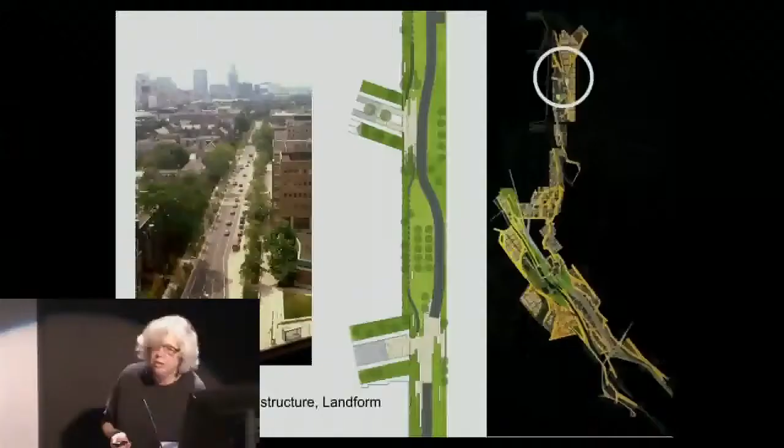Okay. And this was the title slide from last year's talk, and I was talking about linear networks, and I'm talking again about linear networks, but we're focused more this year on railway corridors. The ones that we talked about before for linear networks and how they made that middle space that we were interested in were projects like St. George Street and the West Toronto Railpath, which goes along a railway corridor, which is really the direction I'm going more in today.

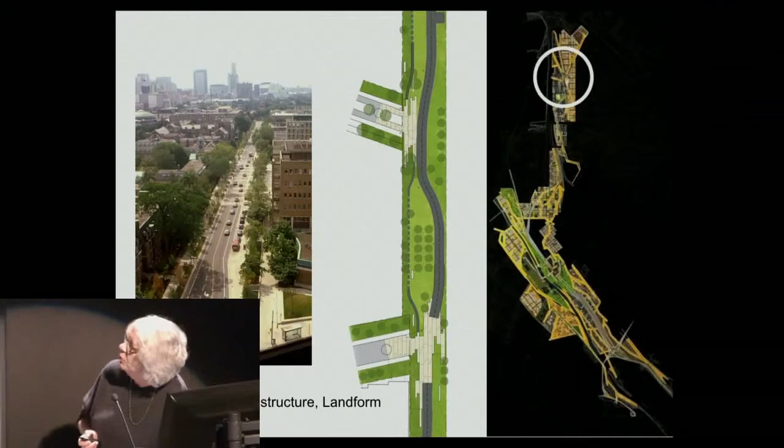And also the more organic thing that was based on earlier Garrison ravine work, where we transposed that organic model into a new sort of civic regenerator machine for the Montreal International Gateways competition from several years ago. So I wanted to focus on a number of projects. What we're doing right now is some in-house research on Dupont Street in Toronto, which is a really fascinating area for us, and it brings into play a lot of earlier work that we've done.

So what I wanted to do today is talk about several topics through some of the projects we've done in the last 4 or 5 years, which talks about agency and the autonomous agent, public space and infrastructure, making objects and spaces, connections for parallel systems, and essentially leading to the whole idea about employment lands and building types that can be great generators from the railway corridors.

The railway corridor, for us, is one of those amazing historic systems that run through the city, and is very often lined with either abandoned industrial or light industrial. It's also an area that has relatively strong boundaries of where you cannot trespass, and those are one of the big things that we want to talk about, how you cross disciplines, how you cross agencies.

To talk first about the West Toronto Railpath, which was an area where there was a line that the city was able to obtain in the west end of the city. So you have a whole rail corridor on one side that is still in operation, which is in fact the Union Pearson link, which is going to open soon. And then the West Toronto Railpath, which was made into not just a cycling expressway, which was what it was meant to be to begin with, but more of a linear network park that reconnected the city back, made connections from the street up into the upper landscape.

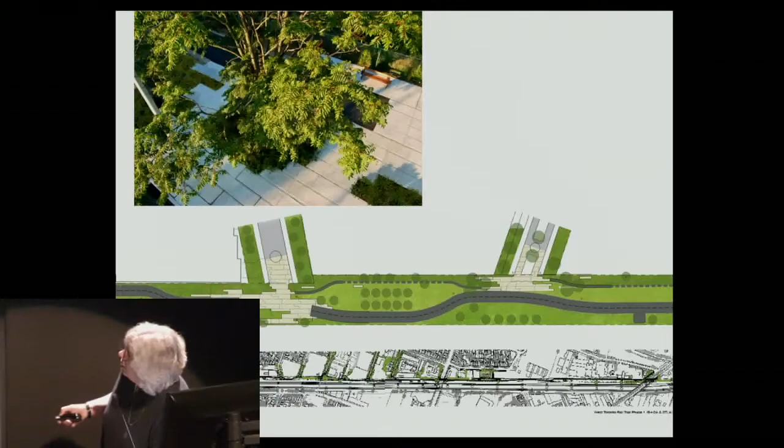So what you have, in fact, is a system of a linear network that actually started connecting all of these streets together into a linear system. And then you see where they connect into streets and into buildings which are now starting to get developed around the edge. So it starts spurring a whole building intensification along these edges of the city.

And also, this is the Wallace Avenue Bridge, but where you have these pedestrian bridges, you start having a really terrific system for people on the other side of the tracks to actually come over and make use of that system too. So it points the direction to where you want to have more linkages. This is another one of those street endings, very simply done, where the street ends there, different pavement, and then you continue through there.

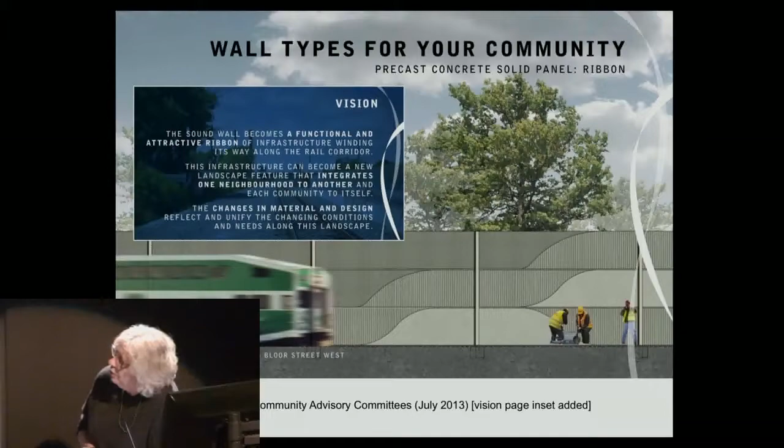So based on that project and based on other work we've done, we worked with the Junction Triangle Rail Committee, and I think I mentioned this project briefly last year as well. But this is a Metrolinx panel, and the Union Pearson Link also runs by the West Toronto Railpath, which also, of course, goes from Weston down to Union Station.

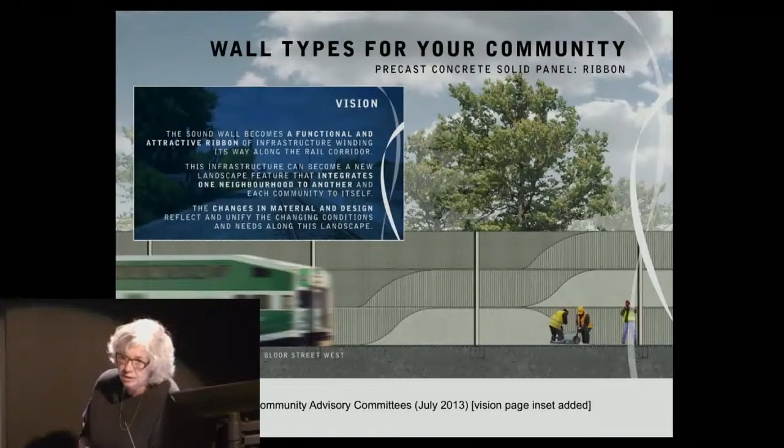One of the controversial things that was happening was this 5-meter sound barrier wall, which was being built. It's 5 meters high, which is quite high, and also blocks off that whole corridor, and it was built as if the trains were running at capacity. These are diesel trains, and so they were building about 10 kilometers of noise barrier walls.

So, always anxious to burn bridges with large institutions, we decided to work with the community and actually put together some work with them. But the idea was that this is the base project which is happening. So you're having about 10 kilometers of noise walls being built. Here's the Weston GO, the Eglinton Crosstown. These are connections that could be made to work. So you have the St. Clair streetcar, the Bloor GO station, the West Toronto Railpath, Carlton Car, Bathurst.

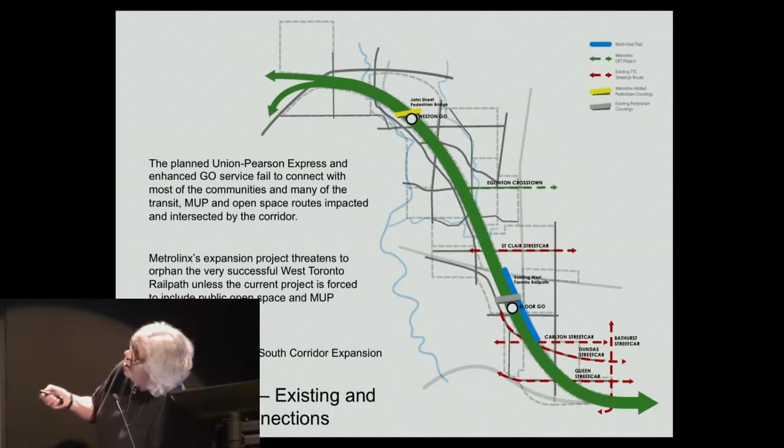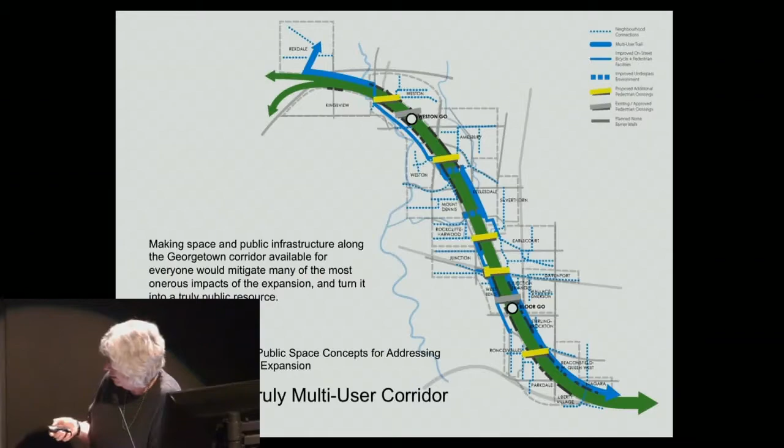And there was a lot of mapping, but the point of the mapping was to show that instead of creating this dense wall 5 meters high, you could start using that as a catalyst infrastructure for creating a shared boundary with the communities that could then start creating pedestrian linkages and basically start connecting all of these neighborhoods named here to the other side of the rail corridor, which were historically disconnected when the railway came through. And the idea is that it's a multi-user corridor, and that the boundaries are shared rather than closed down.

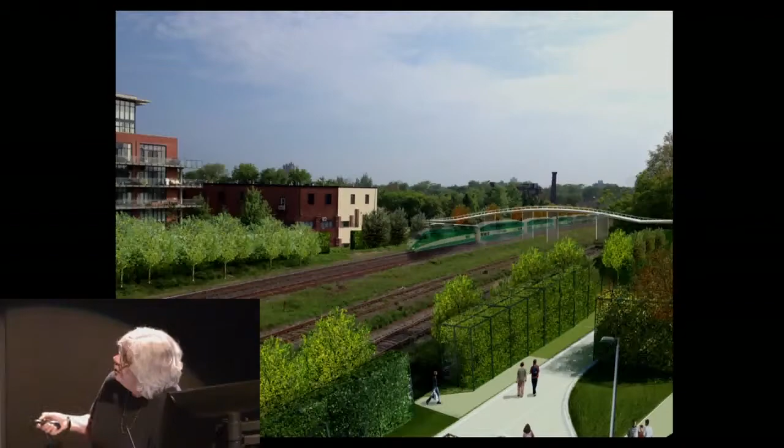But the fact is that these rail corridors give us this opportunity to create public space connections all the way through the city, from inner suburbs to downtown, and that divided city that we're all talking about actually has these built-in networks that we could be using. More pedestrian bridges that connect the neighborhoods together, a new urban forest planted to replace the one that they took down.

So if you go through a number of quick scenarios of the West Toronto Railpath, this is showing, for instance, that forest that used to be there. This is it now without the forest. And then that's the West Toronto Railpath with the 5-meter wall against it. And then, if you have to have the wall, try other things. Try pilot projects. Try to ameliorate those things. Obviously we're attached to the West Toronto Railpath, but there are all kinds of other situations through there where those things can happen.

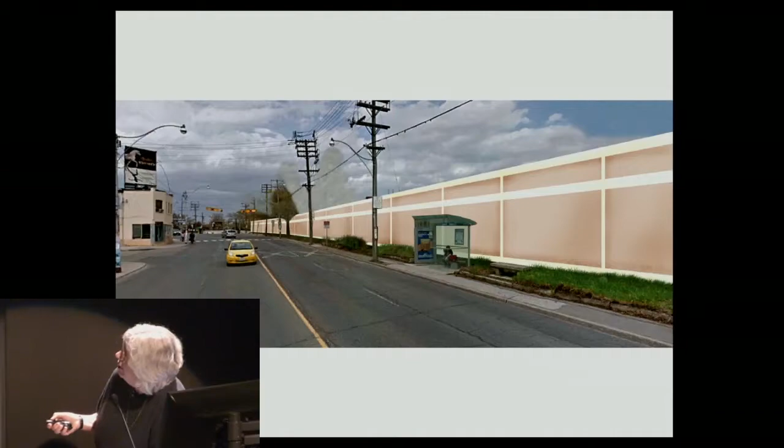Here, for instance, at Dundas Street West, north of Bloor Street, someone's gone to some trouble to try to landscape that narrow piece of land there. So what's going to happen is that you're going to get a 5-meter wall, and this little strip kind of becomes nothing because it needs that space behind it.

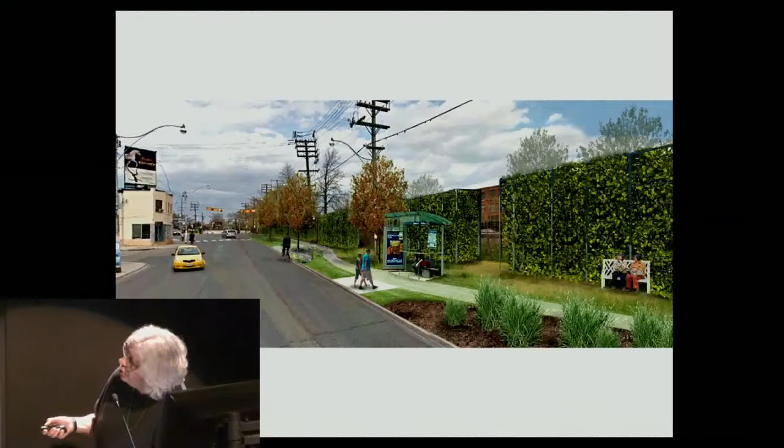So at the same time, and this is a question about agencies and these very strong corporate groups that operate separate from the government and seem to be a bit above the government, when this is going to happen, why not, first of all, build the shared boundary? But then at the same time, maybe there's a time that the City of Toronto could start talking to someone about, well, maybe this is a good opportunity to make this a wider pedestrian network, and we could look at narrowing this street. The thing is connecting things.

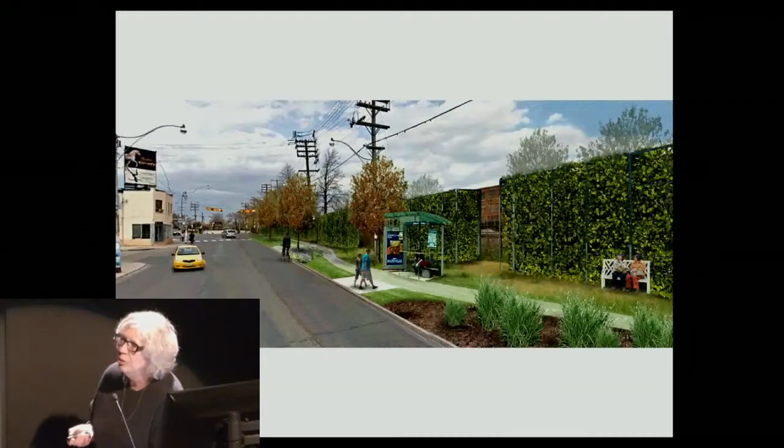It's like talking about silos that need to be broken down. At this level, you have the silos of the railways, which are unaccountable to anyone, as it would appear. Metrolinx, the province, the City of Toronto, and who else? I mean, there's lots of others, they all spring up. So the idea is that these opportunities are things that we should be taking advantage of.

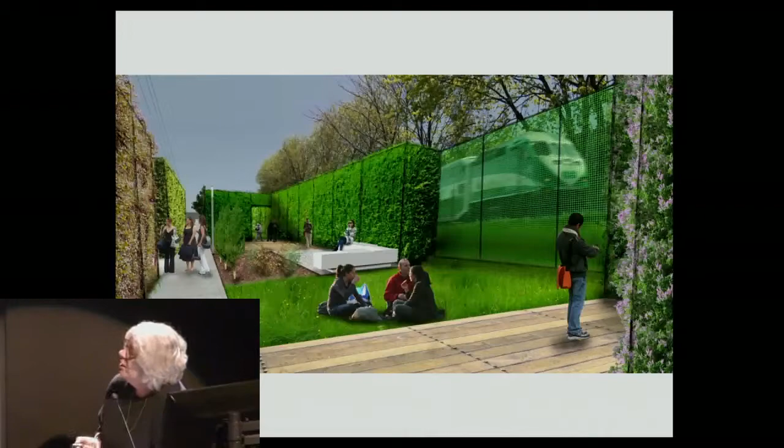But the point is that if you are working for the city, or if you're working for Metrolinx, they have their boundaries very strictly applied, so that you really can't be that agency that suggests those changes. So our point of view is that as autonomous agents, we're sort of dropped into a situation where we can suggest things about the railway corridor, the planning department, transportation, all of those things, but they need to be cross-fertilized or cross-pollinated, as it were. And the agencies we have now are not able to do that. So that is informing why we are actually looking at the Dupont Street study.

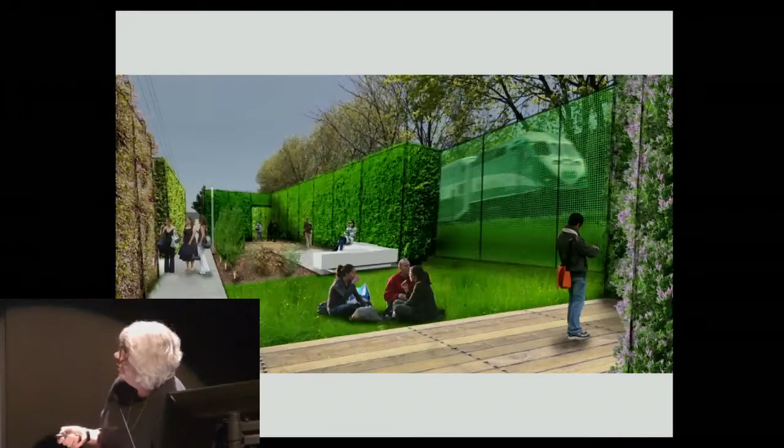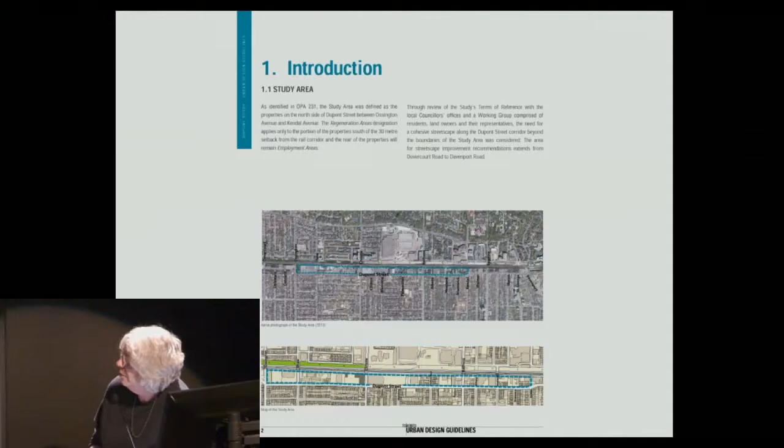This is actually an illustration from the hydro corridor Greenline competition from a couple of years ago, which again shows the idea of having a public space network at the same place where you have a train going by, green walls, rooms in the garden, essentially. So to take a step into the agency question, and I don't mean this as a criticism of the planning department, but because of the limits that they necessarily have to place on themselves, we're not getting the true potential of these areas in the city that we should be.

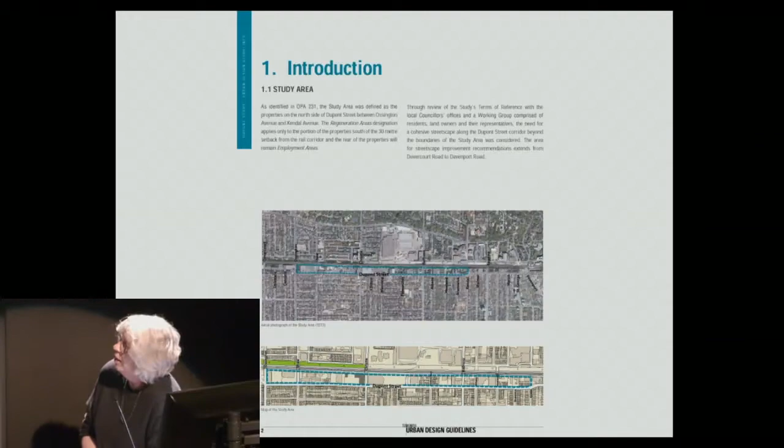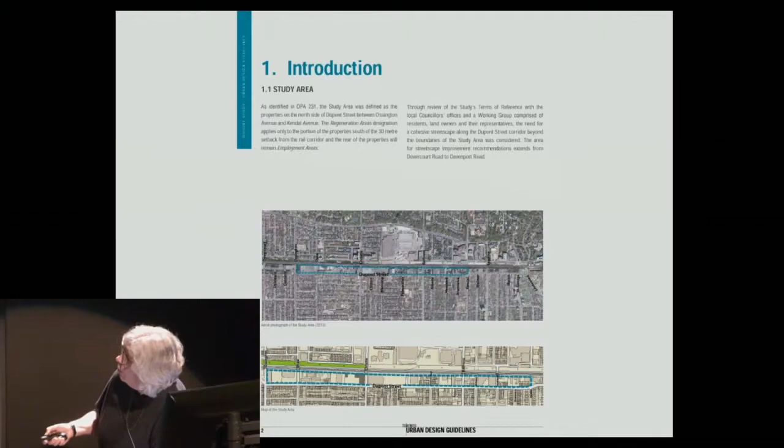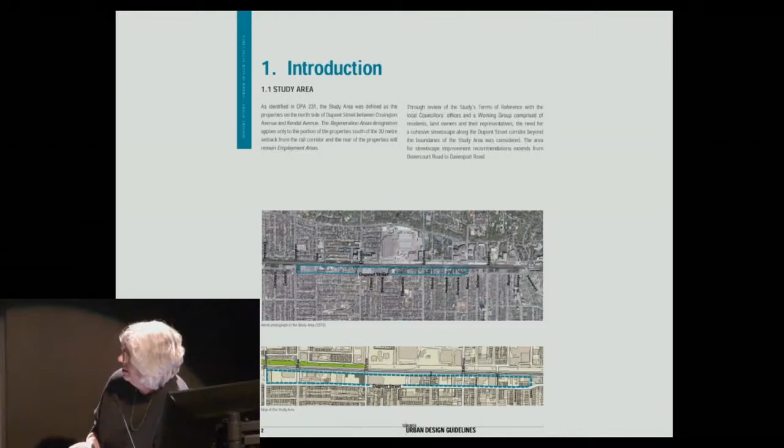Looking at Dupont, this is the City of Toronto Dupont study, and really it looks at the employment lands in this area. I believe it's between Kendal and Ossington. And what's going on in this area is really quite an amazing part of the city. We have the hydro corridor, we have a whole established neighborhood to the north. We have the hydro Greenline corridor directly to the north. We have the rail corridor. And then we have Dupont Street, which is a long street with several cross streets at key intersections, but basically one long area that is really used for employment, for earlier loft buildings, a lot of single-story buildings, and is actually up for a lot of development applications right now, which are not particularly attractive.

The disconcerting thing about the Dupont study for us was that there's an immediate adoption of the avenues model of building on Dupont Street without any real contextual analysis of what was there, really looking at what was going on on the street, any kind of public space initiatives, and assuming that there's nothing in here where the city can really insert itself.

If you look at this, this is the mid-rise model inserted into the Dupont study. It's a typical mid-rise building, 3-story base, set back, 3-story upper base, set back, 2 stories. And basically a very thick building, and we were talking about some of those possibilities of employment type buildings this morning. And I thought it was interesting, the talk about the tertiary and secondary systems that could actually make these built forms more porous.

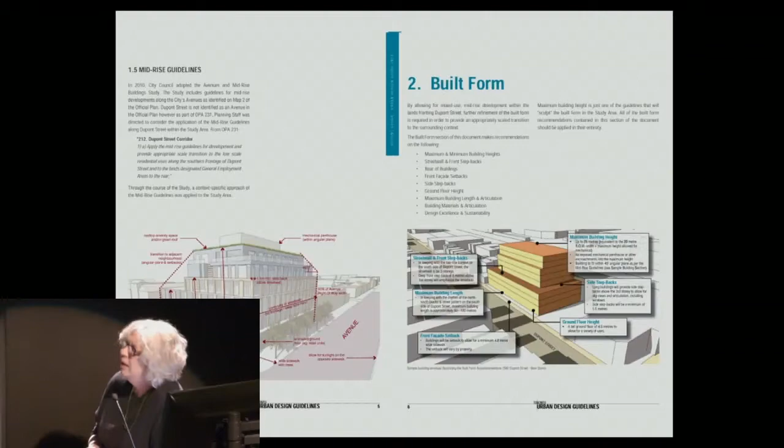And also, there's nothing going on behind here. There's no talk about the railway lands. The whole railway corridor is a system, we should be able to plan for 20, 25, 50 years into the future.

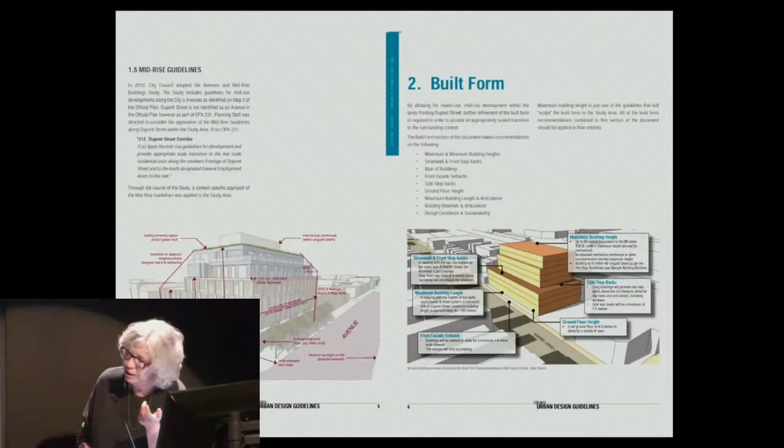I'll only be about 60 then. And we should be able to actually imagine electrification. We should be able to go past diesel trains. We should be able to talk about, as Andrea was talking about, maybe not this particular corridor, this conversation, but the idea that this could become adopted as part of a city transit system. Why shouldn't we be developing guidelines that anticipate things that could happen in the future, and by anticipating them, start the work in the right direction?

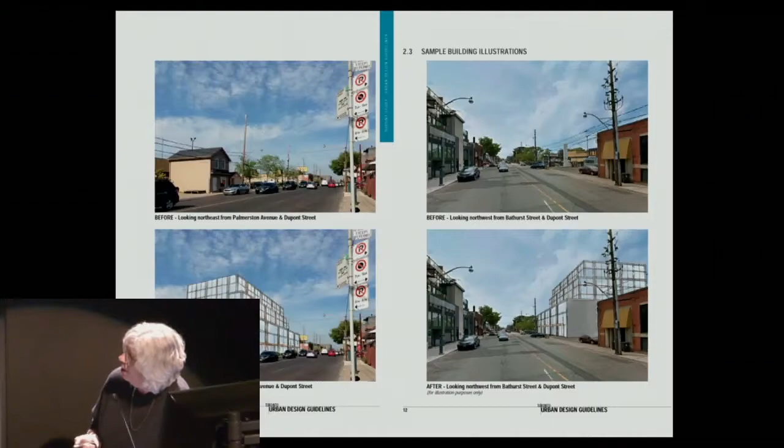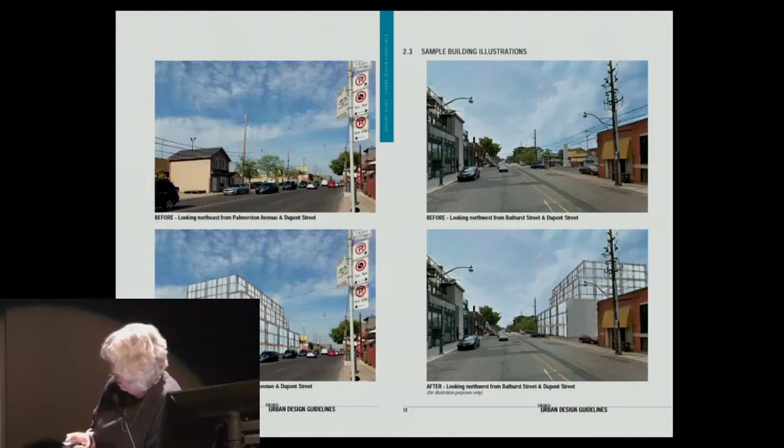This is a view of Dupont Street from the city's study. And I just think the city could do better than this. And these are the areas that are under review for applications. So you can see there's quite a bit happening, potentially happening on the street. There's a lot of interest in development, and this is surely the time, or maybe 10 years ago was the time, to actually be looking at all those potentials that exist in this area.

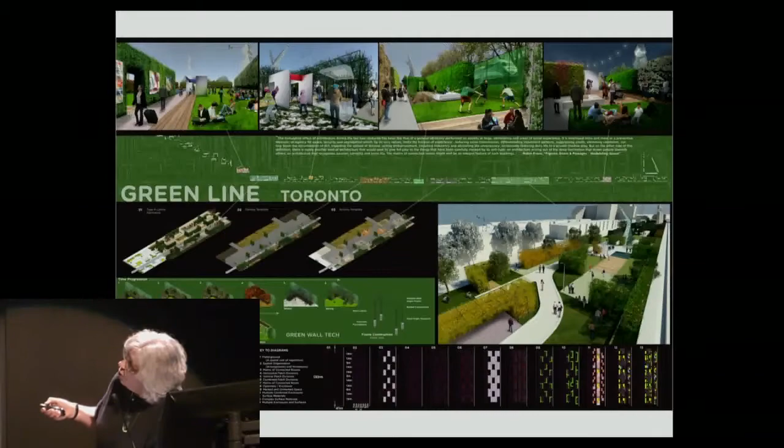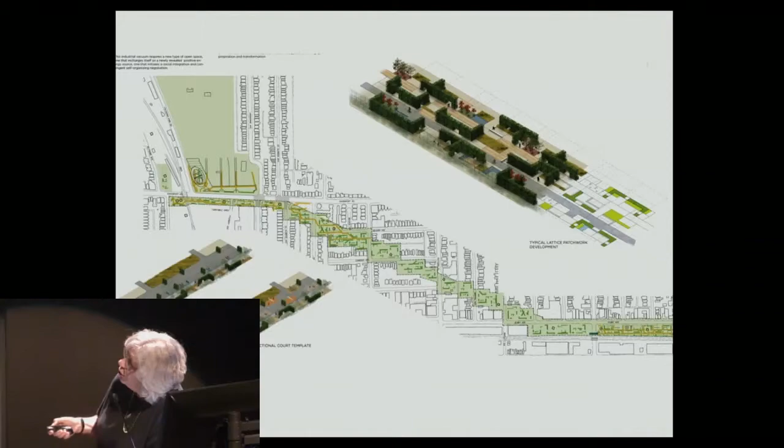See, this is a part of that plan, so that where you had a parking lot, you developed the edge of it, and as it became more and more public, that would become more like the model of the actual rooms in the garden that would go along that whole stretch of the hydro line.

And that could be a spot for, right now you see this happening a lot with advertising. It could be public art. It could be a part where you store bikes and people can walk right through there. And where it connects into the street, you could have a public washroom. Heaven forbid, in Toronto you would have a public washroom, or a pop-up cafe, things like that that actually start connecting that landscape of public space back into the city at regular intervals.

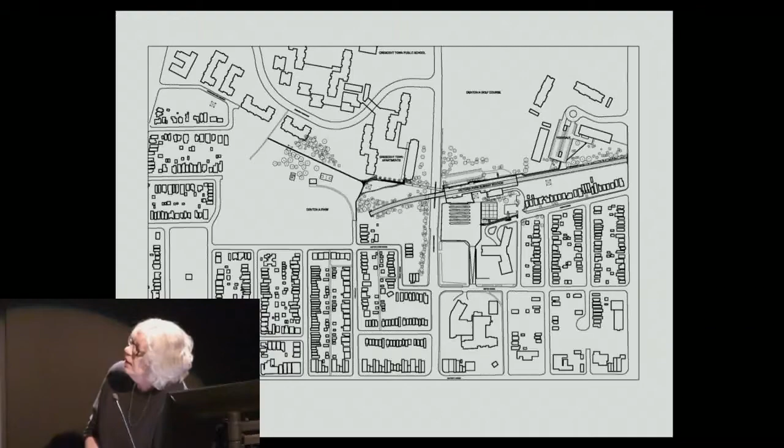So really at that point we were looking at the public space connections, the potentials of these linear networks and how those work to connect neighborhoods, and making new long public spaces that connect back into the city itself.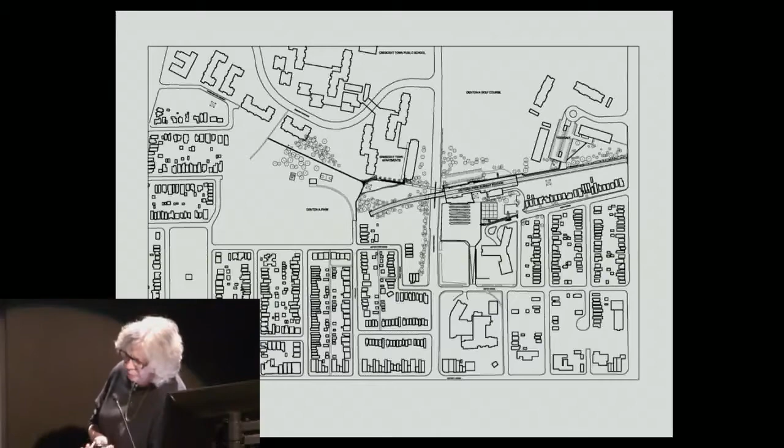This is another project at Victoria Park Subway Station. It's a different kind of railway corridor, but one that we worked on in different stages over the last 10 years. This is the Victoria Park Station here. The subway tracks come along through here and then disappear into the landscape and go underground. This would be your above-ground subway, Philip, that we were talking about at lunchtime.

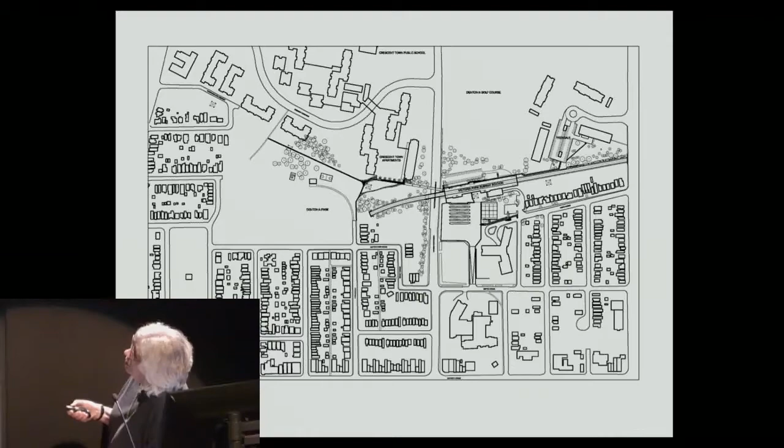And this is at Dentonia Park, where you have basically an empty, nondescript park here, and a pedestrian bridge connection. And then you have a lot of high-rise towers that have been built in the tower-in-the-park model. Our mandate in that project as urban designers was to start figuring out these open spaces in the larger context: we had Massey Harris Creek, we had Crescent Town, we had the tracks, a park, and then a traditional neighborhood on Bloor, the Danforth down there.

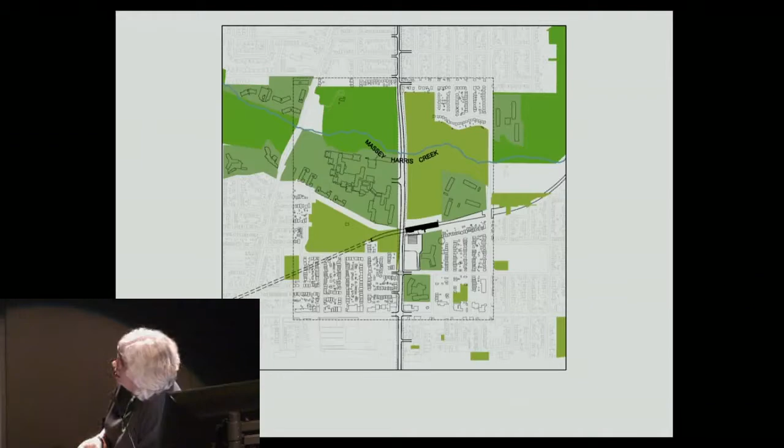So for us, the challenge was to start finding ways of making stronger pedestrian connections into that transit hub at Victoria Park, and trying to bring more of a real linear park nature, springing from these pedestrian routes from the Teesdale apartment buildings, across Victoria Park and into the Crescent Town buildings here, which is already really well traversed, but trying to make it safer and a way that can springboard into more public space.

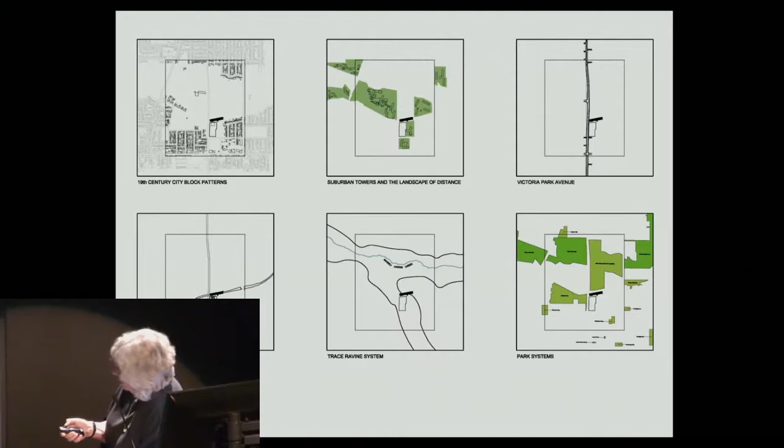The system, these are some diagrams that kind of show the traditional block patterns, the suburban kind of towers, Victoria Park Avenue, which really just began to have sidewalks after this project was finished, the tracks, the ravine, the trace ravine, and the park system. So this is all kind of an area where all of those systems are sort of disconnected, and how can you find a way of bringing all those together?

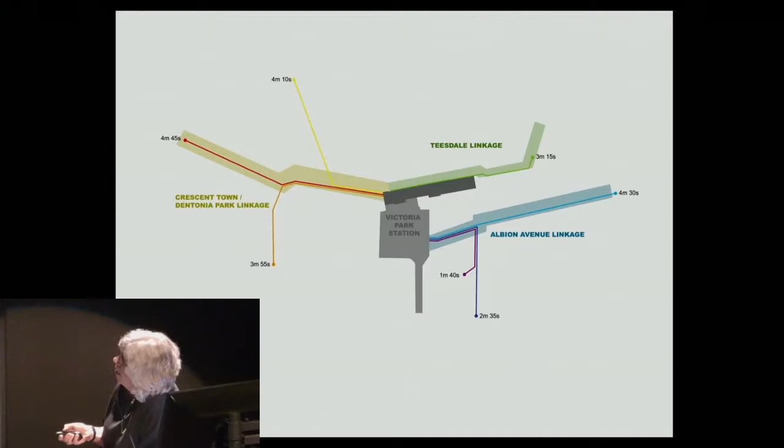The apartment linkages we were looking at were the Teesdale linkages from here, the Albion Avenue linkage, and also the Crescent Town linkage. So that was the existing condition of Victoria Park. I mean, this stairway seemed to be, speaking about agency, in a kind of a no man's zone where there's a sign that said there was one flight of steps that was not going to be maintained by either the city or the TTC, so you took them at your own risk. It was a very bizarre situation, but it just somehow fell between those jurisdictional cracks.

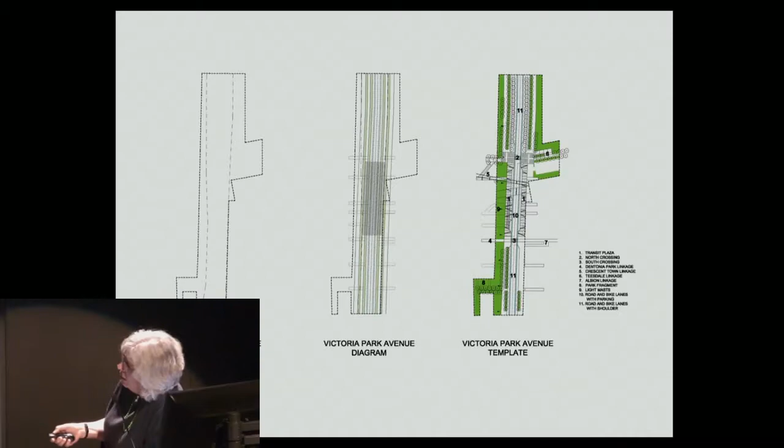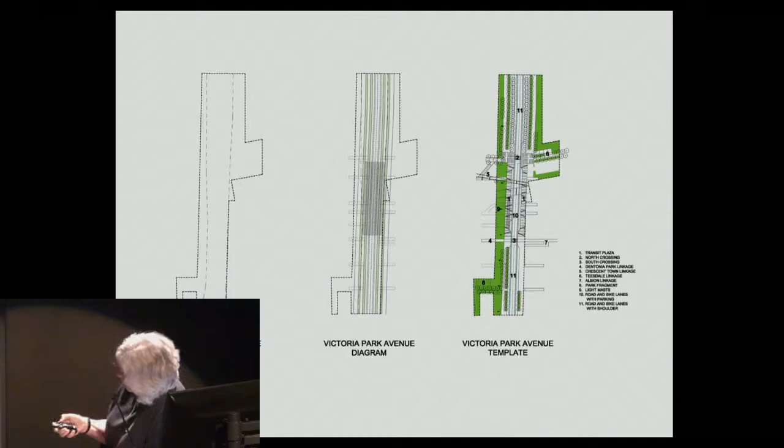So when we were looking at that system, again, we wanted to make a sort of a transit plaza that started connecting that area with an actual at-grade entrance. At that point before, you actually couldn't get into the station at grade. This was just a kind of a concrete pit, and you had to go up those stairs to get in there, and that was the pedestrian bridge coming over from Crescent Town. And so one of the things that we did was to look at Victoria Park Avenue and start to create a template for a transit plaza that would start making Victoria Park into an actual pedestrian rather than arterial route. So those were some of those diagrams.

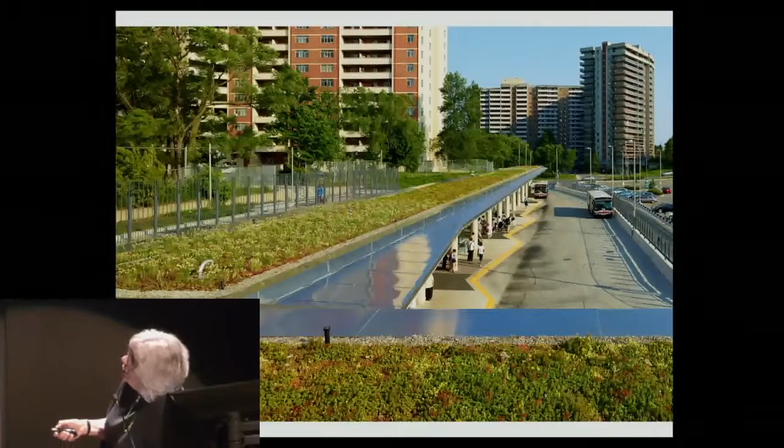And starting from the inside of the station, trying to make connections between the transit and the open space. Windows were actually put into this, which made a huge difference for the platforms of the subway station. And the transit plaza itself we did with Richard Stevens Architects, with an at-grade entrance into the location and a bus terminal, so this becomes the entrance into the bus waiting area. This is at the green roof, so you can see how these connections are being made from the high-rise areas onto these pedestrian systems that go through here, and then you actually get a view of the green roofs on the station. This is the bus waiting platforms below. This is the bus waiting area as well.

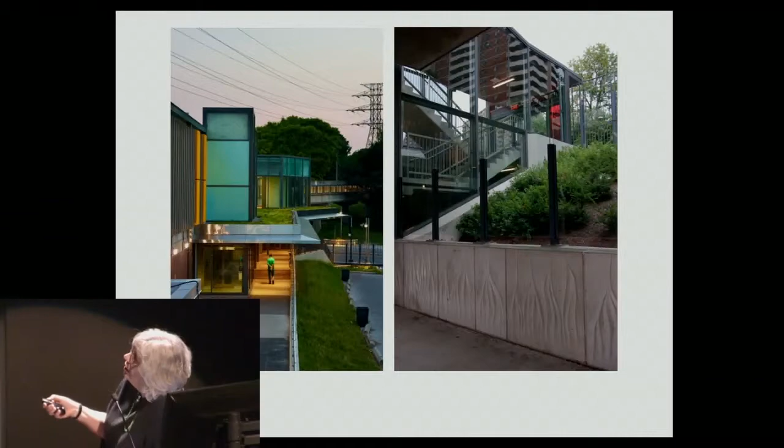There's quite a grade change, but it's terraced up, so that's actually a kind of pedestrian way there across the top, which is kind of transparent. You can look down. You have that connection back to the neighborhood. And again, that's another one of the pedestrian ways going back into the neighborhoods, and one of the stairways that connects from the Teesdale connection down. But that, unfortunately, has stopped at Victoria Park Avenue, because across the street you can't get up into this park from Victoria Park. So one of the things that we've been trying to promote, and this is from Crescent Town when you come out of that pedestrian bridge, is that this whole area could then become a more developed park space. The space below becomes a kind of a terrace space where you can actually go up the hill back into the park.

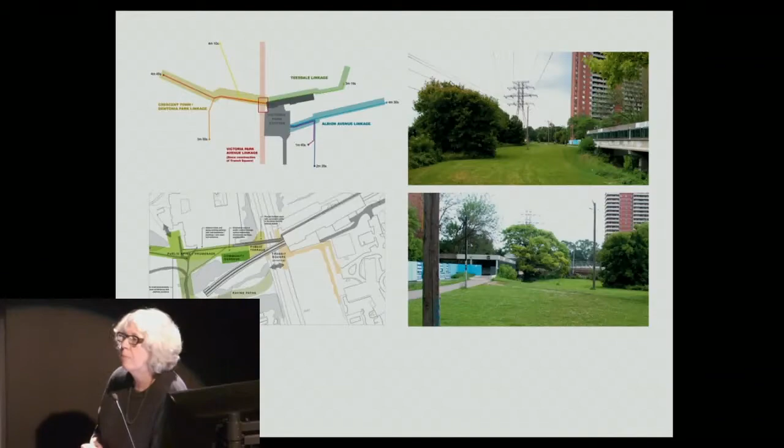But because that's beyond TTC's reach, and there's a bridge agency you have to talk to, plus trying to get public-private conditions so you can actually move through these areas, this is something that can happen, but it has a huge potential of, again, a linear network that could actually work through the city and start connecting large objects like these large apartment towers that need that sort of more public edge.

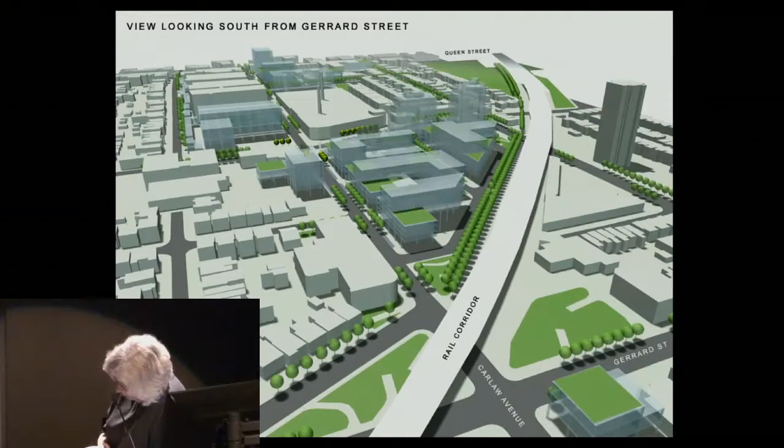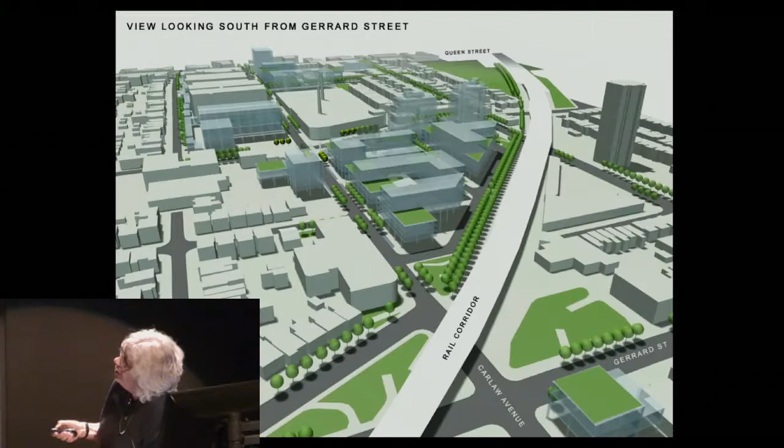Another project that we worked on, which really looked at the building types as a beginning, was at the Carlaw-Dundas precinct that we did for the City of Toronto Economic Development Group. Carlaw-Dundas is an industrial area which has become largely residential in the last 10 years since we've done this study. But this study is sort of firmly implanted on somebody's shelf, by the way. Here we had a rail corridor, and the idea was to create a new road along the edge of the rail corridor with new building types that would be able to feed off that road. This is very similar to what Rolf was mentioning about having secondary and tertiary roads coming through here, and a building type that started to collect public space as a public-private space, because these areas don't really have any public space.

They have very narrow roadways, right-of-ways, with just enough room for streets and a very narrow sidewalk. So the idea is that you would develop a new kind of built form model that would allow for light industrial, that would create public space and courtyards that would connect into, again, a linear network that ran along that railway corridor.

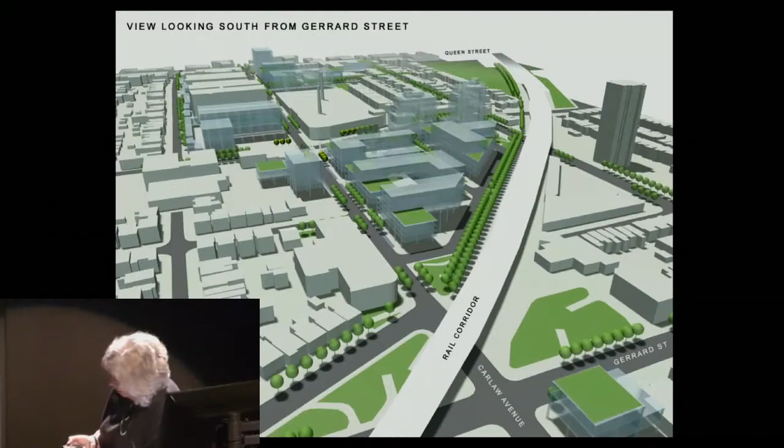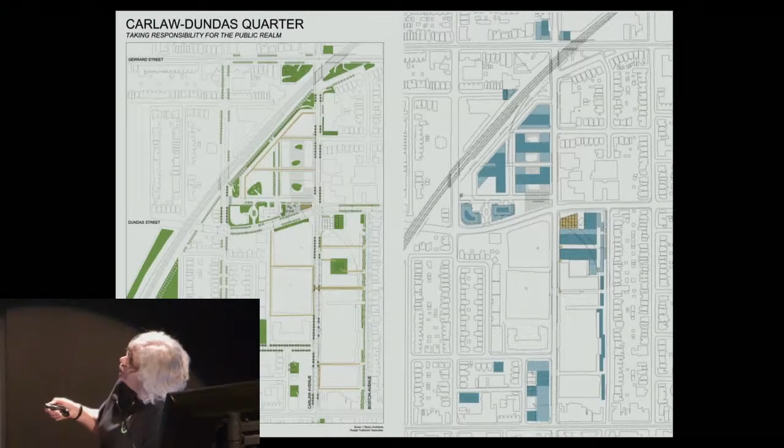That's the diagram of the built form types we were talking about, where you have parts of it that become higher, parts lower, and these are the open space courtyards that start creating a zone of passage through those spaces too. And then this open space diagram, where you get the existing green parks linking into that linear piece that then connects down into a park below.

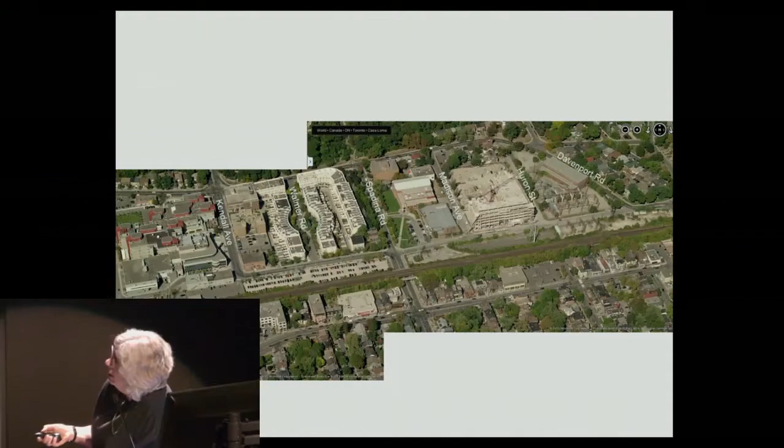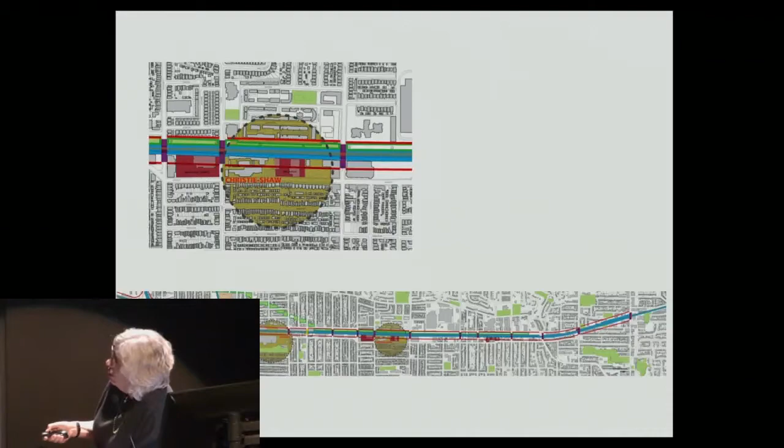And then further to the east, you can see as it comes to Davenport Road. So there's a whole length of space there that's interesting to look at. Now, to look at this first area between Christie and Shaw, this is the zone here. So what we have working for us is we have Dupont Street. We have a very settled neighborhood here in the Annex. We have a very settled neighborhood up here.

We have the railway corridor, and we have an open space, potential open space network through there. So the things that are important for us are to look at things like cross connections across there to connect this neighborhood over to that open space system and this neighborhood back into this system. And so this is a diagram.

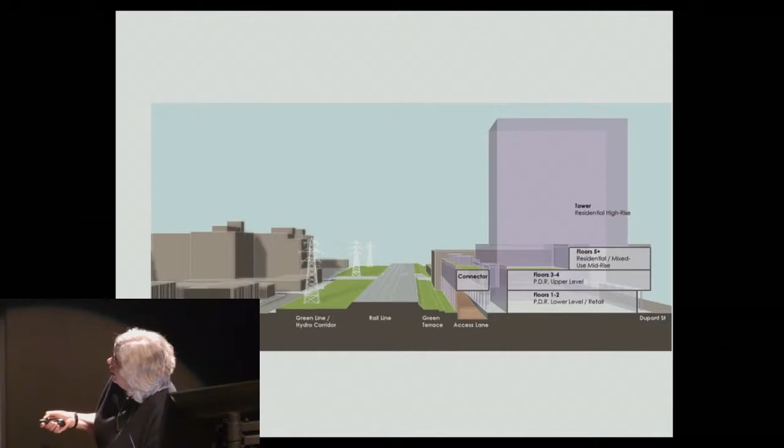This is very diagrammatic at this stage, but this is a sectional perspective we're looking at, so that you could develop a lower level kind of retail or industrial area that made a kind of connection space right along that edge of the railway path, with connections either underground or with an access lane along the railway that created that sort of back lane access into the backs of these building types.

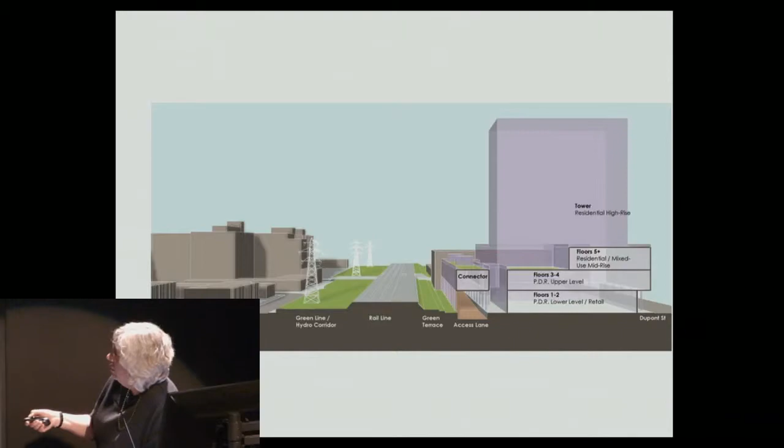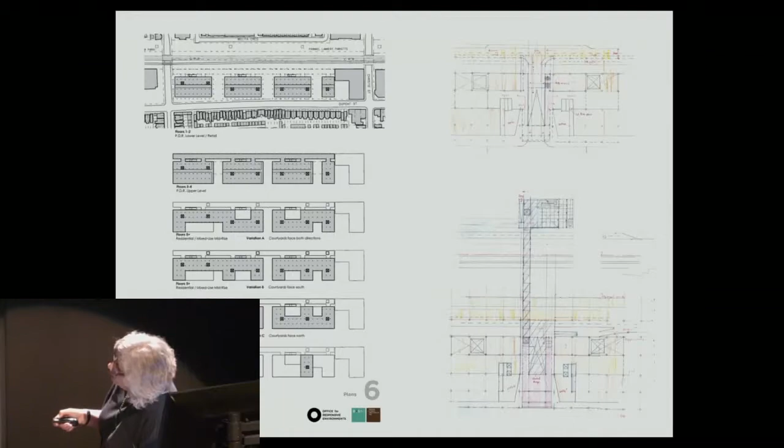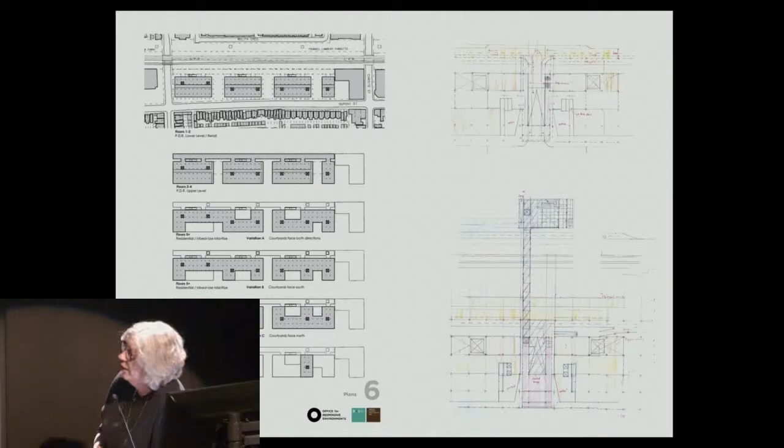So we've developed ideas of how at a lower level you can have a pedestrian or lane access, and then you have an upper kind of access which feeds into these industrial types, and how, as you go up, these can actually get into higher residential uses. So you allow the residential use to become that sort of leverage that can create that ability to actually build that light industrial space.

We're very interested in the Toronto MADE group, part of that maker movement, about being able to create those sort of incubation spaces for entrepreneurial spaces, for trades, for people, for artists again, but for all those kind of spaces that you need, the 5 meter floor to floors, the ability to get lots of light.

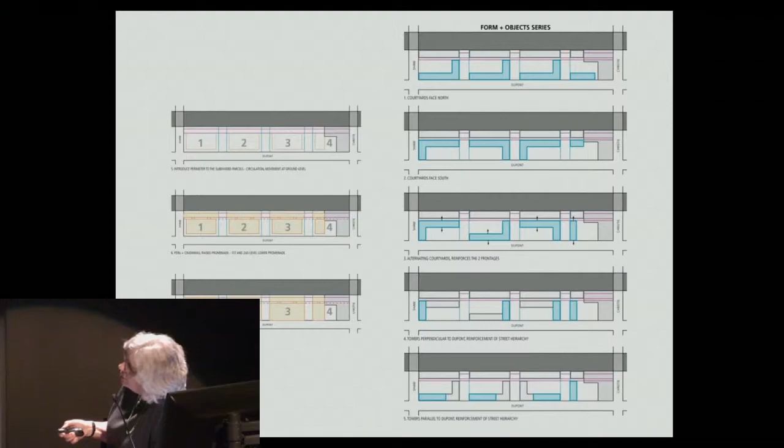So between those two streets, we're talking about penetrating a public space, a city property or something that becomes a group access point for these industrial uses, so that those spaces become group servicing lanes and also a public space that is jointly used by all of those buildings, rather than each building having its own driveway, its own servicing yard, and its own building. So this allows these buildings to make more efficient use of the space, and also breaks up the length of the block.

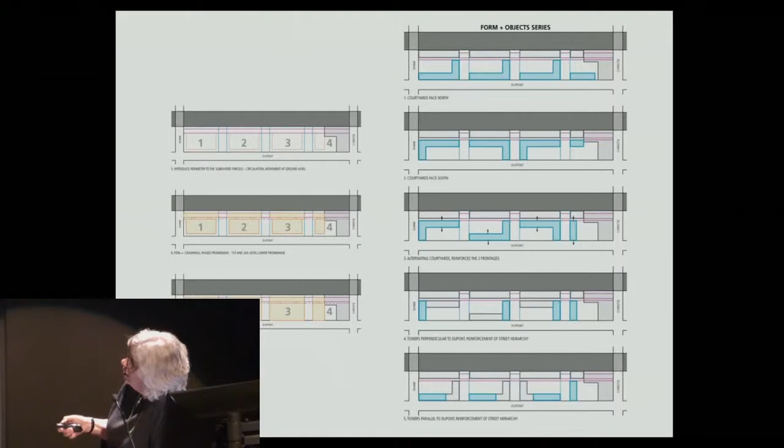You get buildings, again, that can have light on all three sides there, and some light above on the rail side. These are diagrams that show those configurations which bring light into residential units above. This again is that diagram which shows those pieces that are working there, showing the street and the lot and the space systems that we would bring to bear on that.

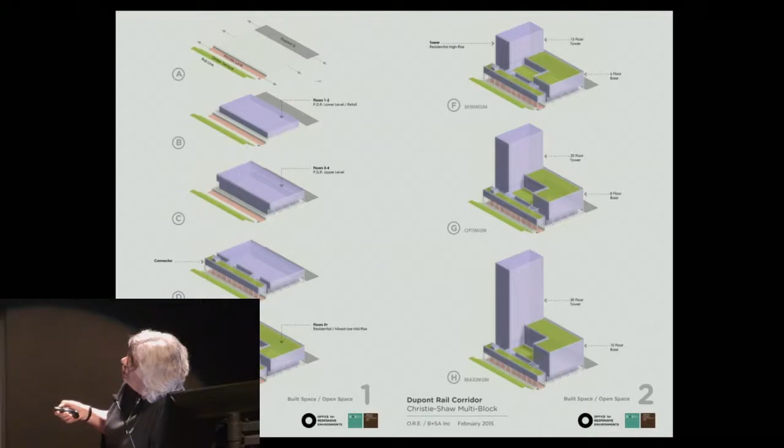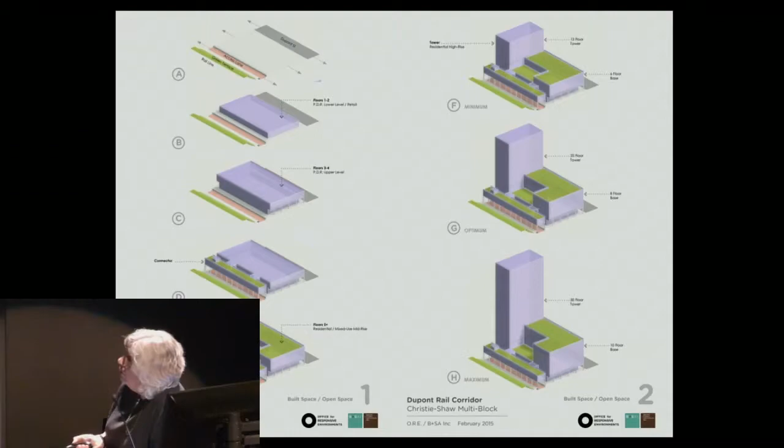Then the lower buildings, the industrial buildings, coming up with the residential pieces above. These residential pieces can be low rise, or they can become higher. It's really just whatever the market bears or whatever happens, that allows those lower spaces to work as new industrial uses. These are a couple of views of that system.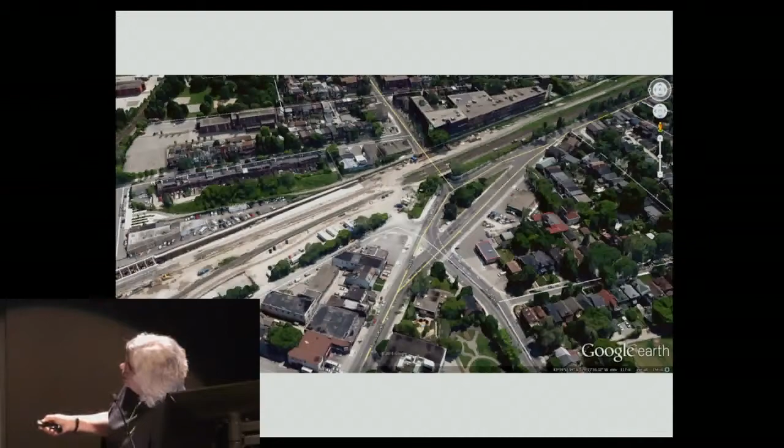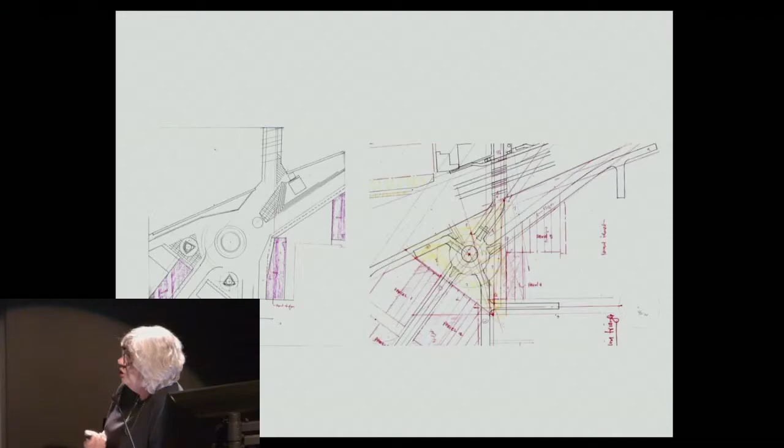And so here's DuPont coming. It goes under that overpass. You can either veer up here to go to Dundas West, or come up here to go to Dundas, or here to Annette. So basically, we're speculating how this is one of those really interesting junctures in the city where something really special could actually happen as an innovation center, as a new area for building in the city.

So we really started to sketch out ideas about an actual roundabout and creating a better situation for that part of the city, so that you would have Dundas coming through here into a roundabout which connects it back into these other streets in a more public kind of, I don't like the word celebration, but the whole idea that there's a public space, of something special happening in that zone where these things all come together along the railway.

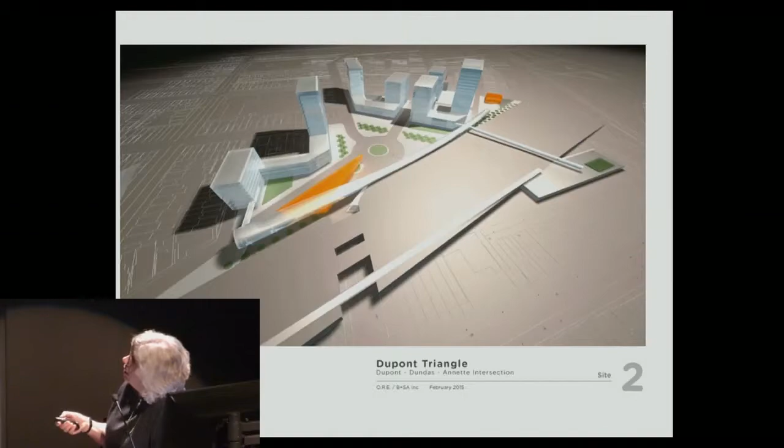We really don't have the working plan of this, but this is showing kind of a modeling idea of how those things could all come together. So you have a special triangular building that kind of marks that off, public space kind of fronting into a new frontage here for new buildings that become sort of a gateway into that west part of Dundas.

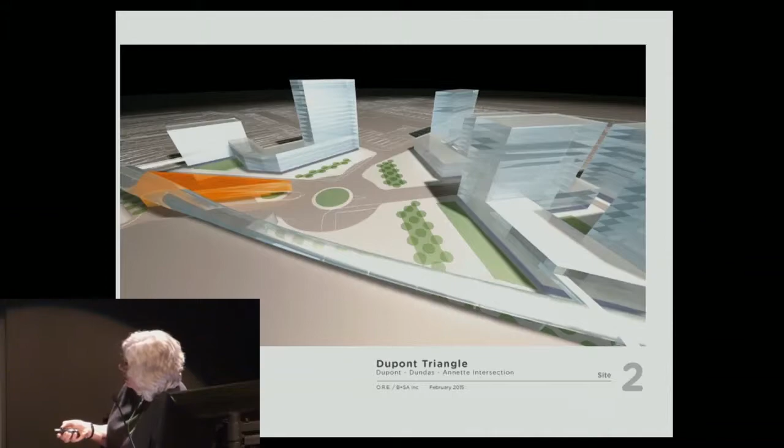And then along the railway, the whole idea is that where you don't have the space to have that, you actually do a raised pedestrian cycling piece that continues that kind of public space system along the edge of the railway.

And the last site that I was looking at was the College Dundas site, where you have a very strange condition where Dundas and College meet and they bridge over the railway. And there's also a spur line that comes across here. So this is the main railway line. This is the spur line. The West Toronto Railpath starts through there.

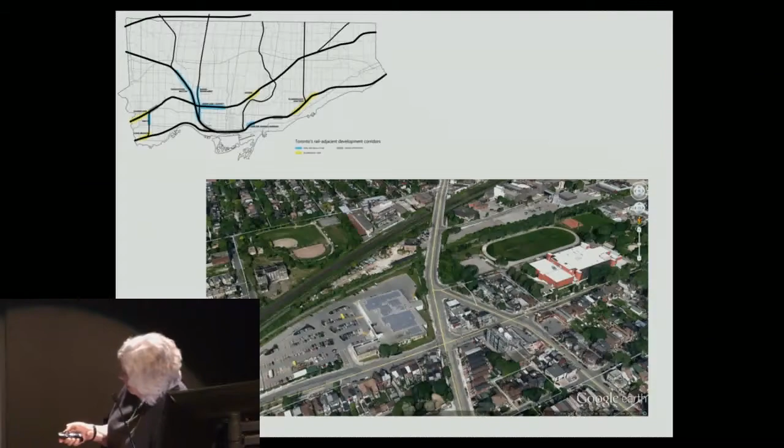And what we're proposing in this zone is that there's an area of the spur line that could actually be built over. We saw several really interesting spots in Paris last summer where they're actually building over, in this case, a small spur line, which allows that kind of more connective space, because there are so many fragments in this site. This would be the area that you would be building over.

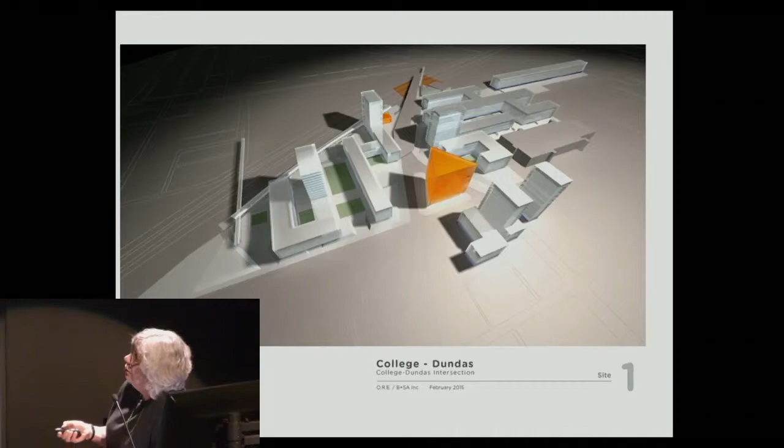So it creates a kind of a new zone for building and another kind of juncture point in the site. These are some of the connection points here, showing the area that would be built over through here, creating public spaces.

As I say, these are very diagrammatic, because we're just in the midst of doing this work and exploring how you can get new built areas in the city where currently there are none. So you basically create buildings, create those zones for light industrial in the city, where currently they're really kind of deteriorated zones.

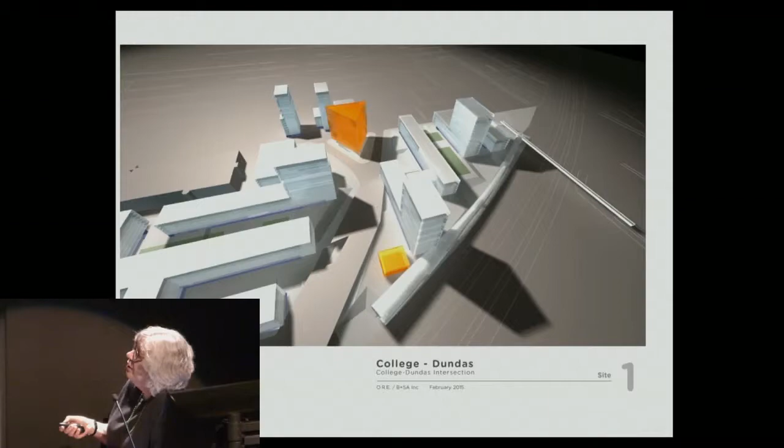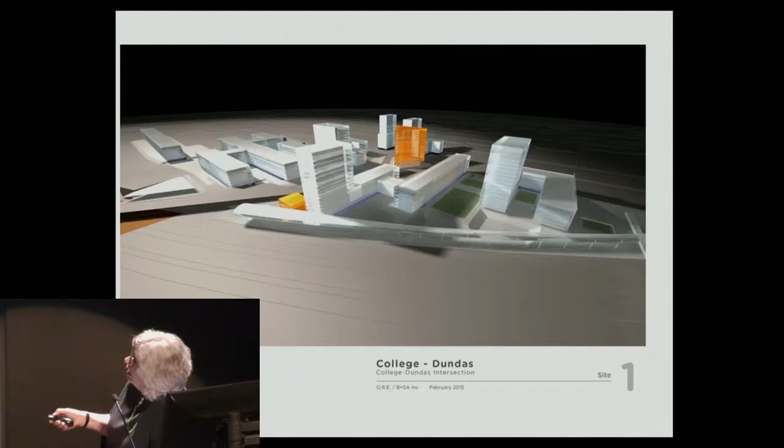So that's showing the College Dundas area again. Again, the same idea of creating that cycling link that goes through here, with another pedestrian bridge, by the way, that goes over to Sorauren Park over there. Sorry.

I wanted to finish with a little parable about another thing we did for the Homegrown competition that was run by the David Suzuki Foundation. We called it Local Monsters, because this was a homegrown competition talking about a national park which happened to follow the path of the Garrison Creek ravine.

And it was all about growing things that butterflies would be attracted to in front gardens, very small-scale interventions in the city. We had been invited to participate, and having gone through that whole system in the Garrison ravine, talking about connected ponds, creating stormwater collection points in the city, reconnecting a public space system, we thought planting milkweeds just wasn't going to do it for us.

And so we designed monsters, basically open structures that you can climb up and see what the system of a park is. We were also proposing these along the Metrolinx line, so you could actually go up and look over that 5-meter wall.

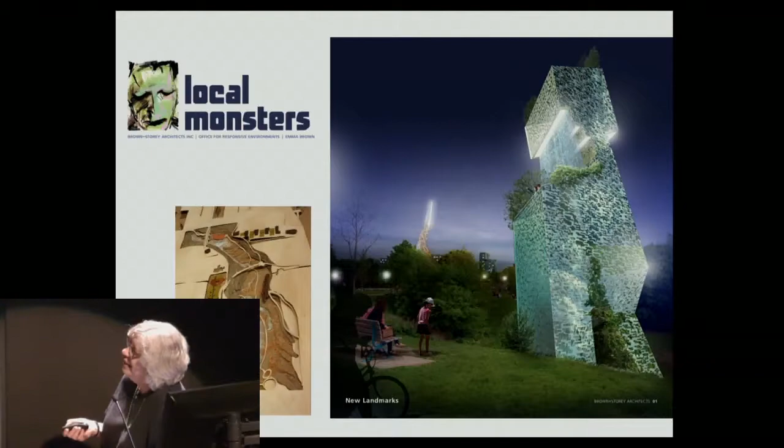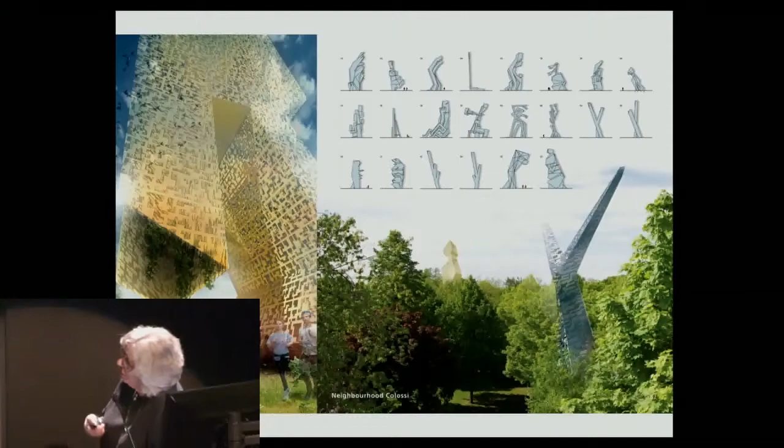This is our other view of that. We actually have about 50 of these built in our office right now, and I could really use the space. But the idea is that these just become markers. Obviously, it's a folly, but we had a lot of fun doing this.

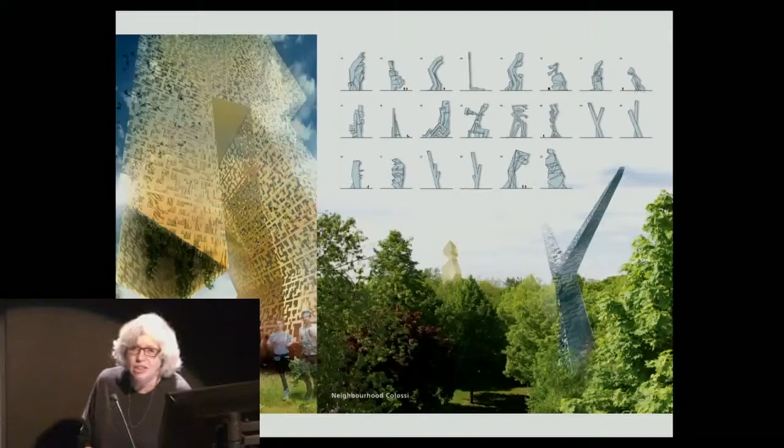But the point for us is that city building, creative cities, needs a spatial software, borrowing a phrase from Keller Easterling. You have to be able to look at the larger picture, and we need our larger agencies to work together to do that. The role of the autonomous agent, I think, is the role of the architect in many ways. So I encourage you all to become autonomous agents and push for these cross-disciplinary things happening in the city.